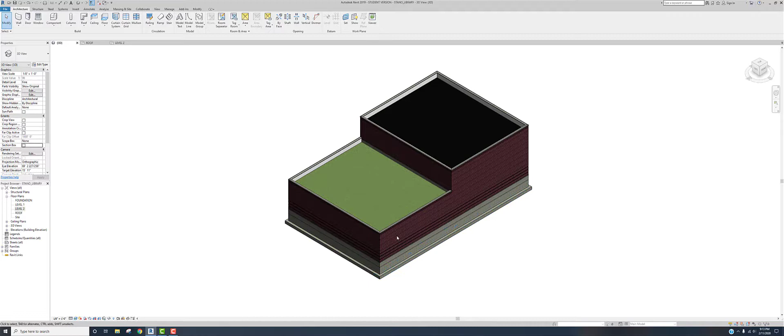We'll do the foundation, the strip footing underneath, and then take a look at our section box and look inside the building. We'll also add our columns, any other structural steel that's in there, and get that ready to go.

Then we can either extend or modify the green roof, add another separate green roof, or add another EPDM roof, depending on what you want. My area is going to actually be a little extension here to add on more green roof area.

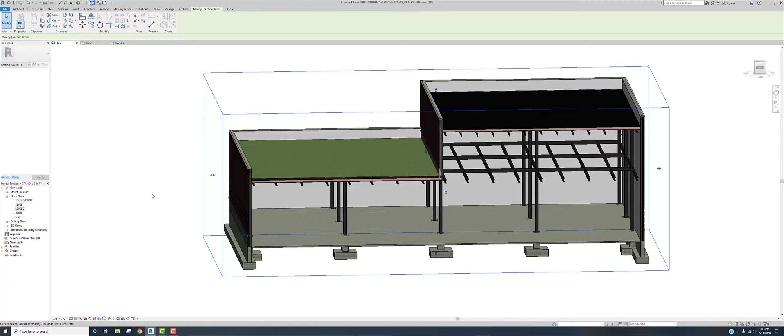Let's just turn off that section box for now and get started. So what I'm going to do is go to my Level 1 view and look at the building here. I have thin line on, detail level fine. So now I can see my exterior walls.

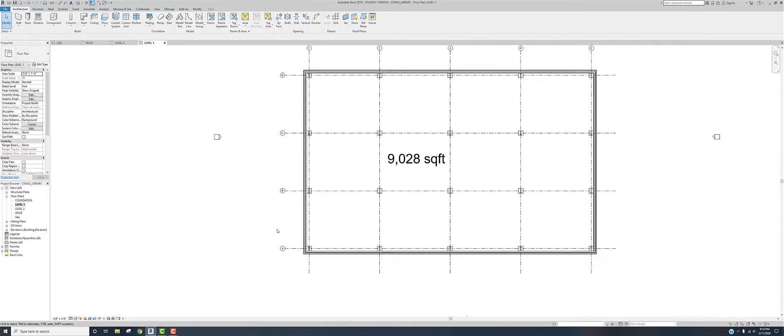I'm just going to do another wall, architectural. I have my basic exterior wall 1, and what I'm going to do is center it on this column here. Let's draw a circle that comes out from here.

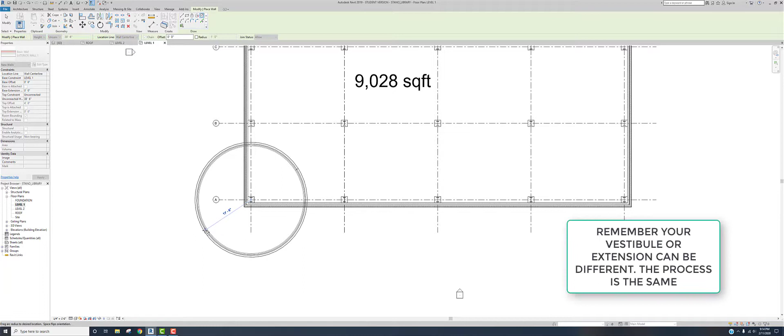This is going to be my exterior wall. So right now I'm going to come out, let's do 20 feet, nice round number, coming off the side of this building. I'm going to click, make sure the exterior wall is facing out like that. Hit escape. I'll have to do the same over here.

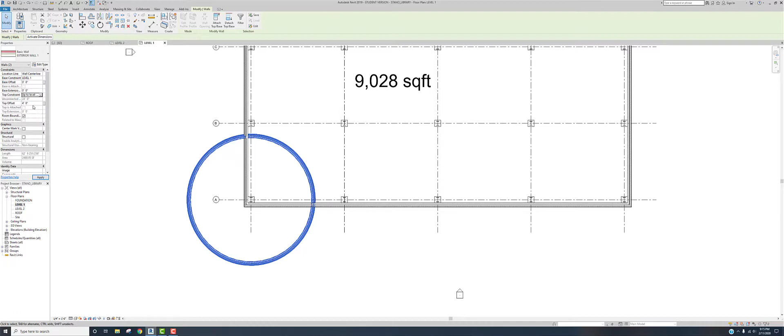So now the exterior wall's out. Level 1 is my base constraint. Let's click on both of these so I know that I have them. Hit control, click - Level 1 is my base constraint, top constraint is unconnected. I'm going to go up to Level 2 right there. Hit apply. Now let's take a look and see what we have from here.

So that is going to be part of the exterior of my building. What I need to do now is delete these wall sections right here. I'm going to trim them, delete this, and then be able to extend the roof. That will be the next part that we're going to go at.

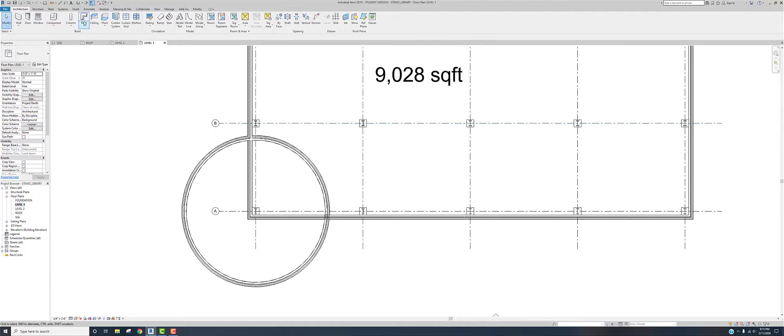So I'm going to go back to my Level 1 and start clicking on this. I'll click on this wall and do trim to corner - click this wall and this wall to trim like that. I'll do the same over here, click here and there. So now they're trimmed.

And you can see now that everything kind of flows nice and evenly. Let's look at it again. So there we go, you can see that I have a column here, and also my green roof there.

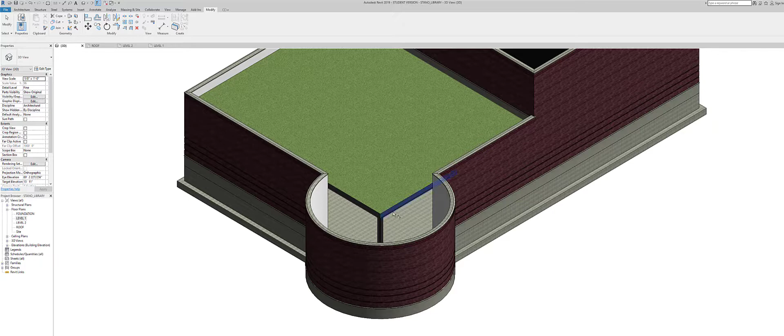I could technically bring the green roof in right now, but I want to do some other work first. Actually, let's do the green roof since I'm talking about it. So hit escape, select that green roof, and go edit footprint. Let's go back to Level 2.

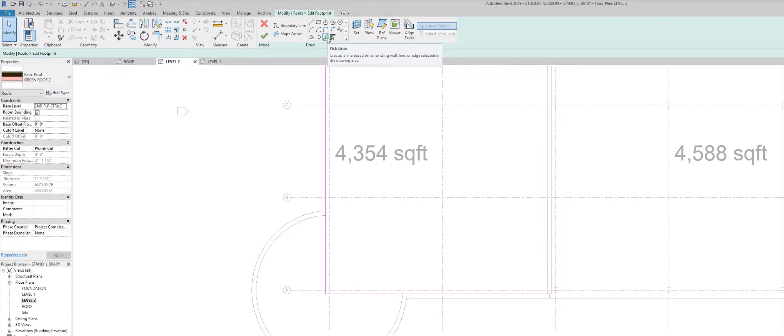So I'm now going to select, go pick line or walls - let's see which one I want to do. Let's pick line, select in like that, and like that. Yes, I know it's doing that.

And then we will do the trim to corner for this as well, so here to there, here to there. And then I can probably, let's see if I could just delete that extra. There we go, so now I have that in.

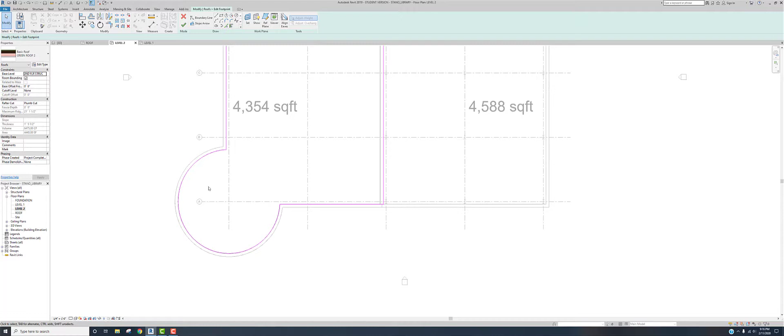You're going to be either doing something similar or not, depending on where you come off. You may not even add your green roof in here, you may do a separate green roof. Click OK.

Look at it, so now I have my green roof there. If we go underneath the building, I have no floor, so I need to extend this slab floor into this region or add another separate slab floor in there. Either way, it's not much of a difference. If I click on the floor, I can see that it's on my level 1, with no other constraints. So let's go to level 1.

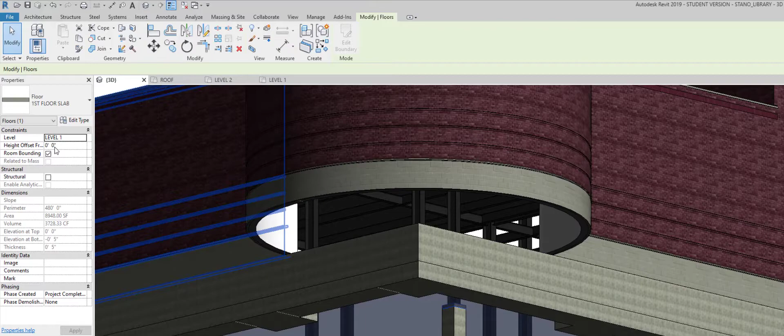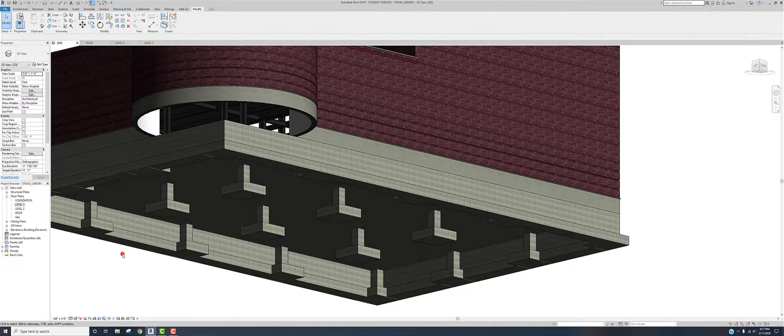What I'll do is I'm going to add in my slab. I could probably, if I select on it correctly... let's see, like this, it does not appear to let me edit the boundary for some reason. No big deal, so let's go to level 1.

Okay, so now let's get this floor in. Floor, architectural, first floor slab. What we'll do with the slab is I'm probably going to have to come either right to over here and over. We may have a slight issue with this, with our foundation. We'll give it a shot first.

We'll see what happens, so I will pick walls. Let's see how this works out for us. There we go, I got the walls picked.

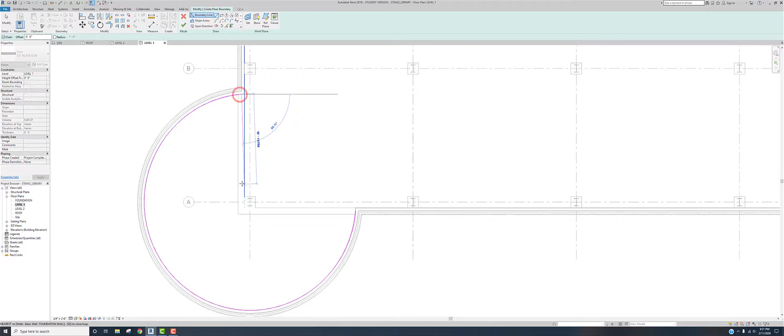Okay, so it looks like we have it. Okay, would you like to attach your walls? Yeah, let's get everything attached. Okay, so now I have the slab in.

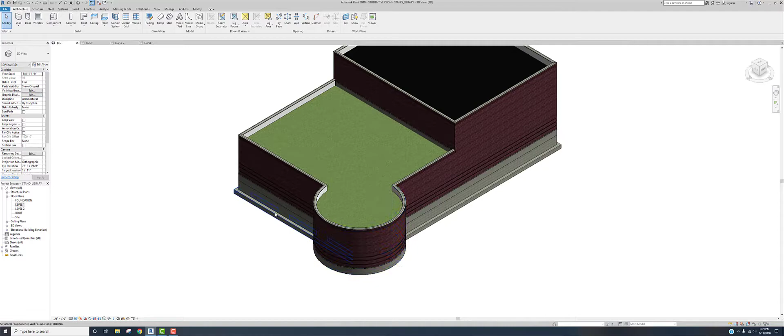Okay, so now let's add our foundation wall. What we can do is click on one of our foundation walls so we can see that it's finished face exterior, foundation, base constraint, top constraint is up to level 1. So we could do the same here. Let's go to our level 1 foundation, level 1 view.

Wall, architectural, basic wall foundation. You can click it, find it here. We're going to do wall center line, base constraint foundation, up to level 1. You need to have those parameters.

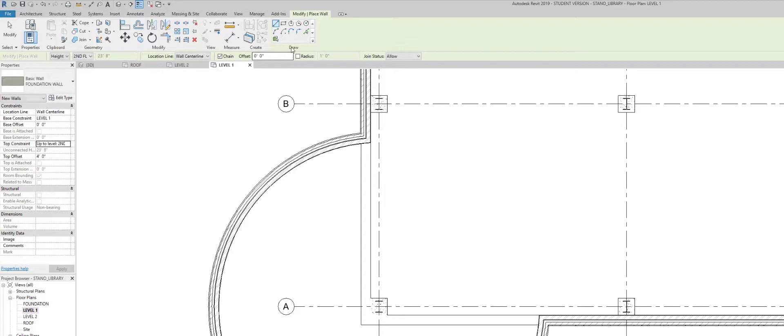Then what I'm going to do is go to pick lines. Now this looks like it's the wall center line. Same with that, so let's click. Now it appears that we have some issues here with what it's selected.

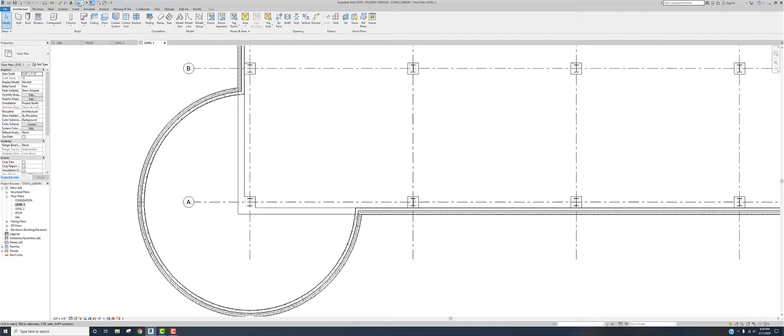Let's go to this view. All right, so let's try to change this. There we go, see how it moved it down? Click. Let's do the same here. Even though we had changed them ahead of time, it seems that...

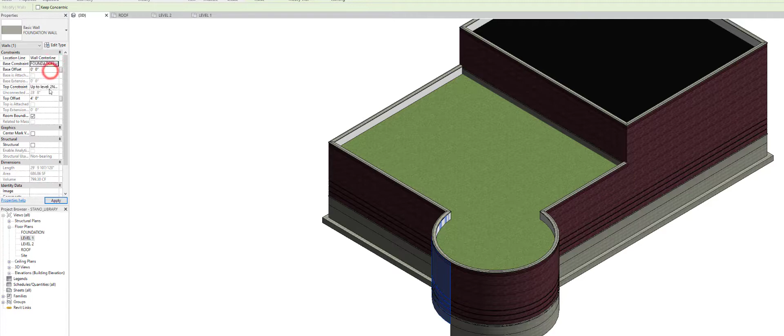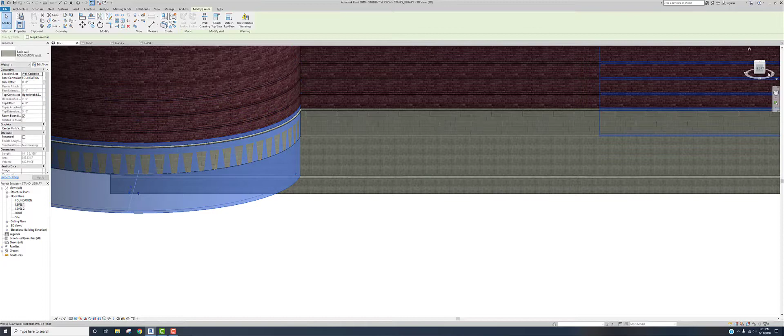We must go down even further so you can see how it's still highlighting over. So we got a base offset. Let's just check our offset. All right, so that's correct. Our top offset, okay, so change that to 0.

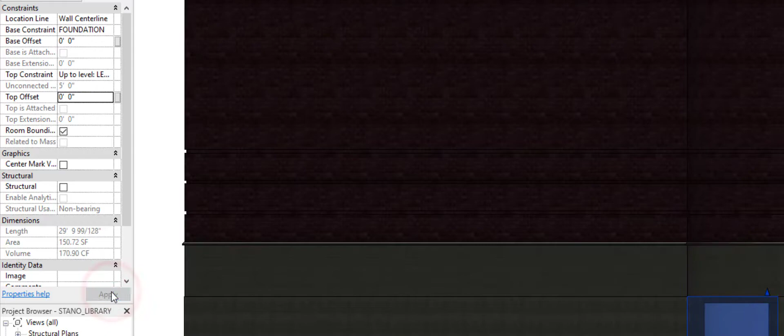And we're going to do that to the other wall too. All right, so little tweaks. There we go, now we have the foundation wall. All we need to do is add the strip footing underneath. So structure, we go to wall, foundation, click, click, and now we have that.

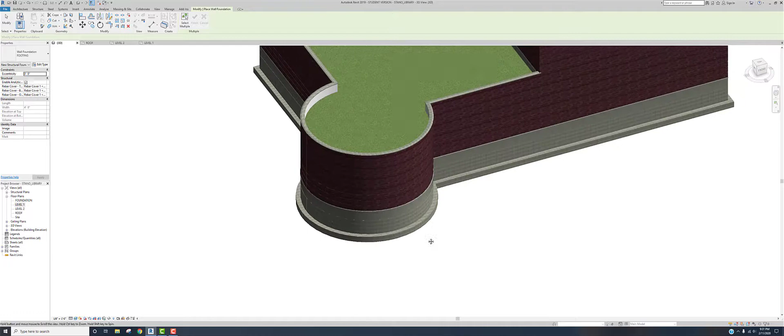Okay, so you're going to do all pretty much similar stuff. If you do a vestibule out front or some sort of extension in the front or off the sides, you're going to have to do the same thing. I recommend saving it at this point. Okay, so that's all saved.

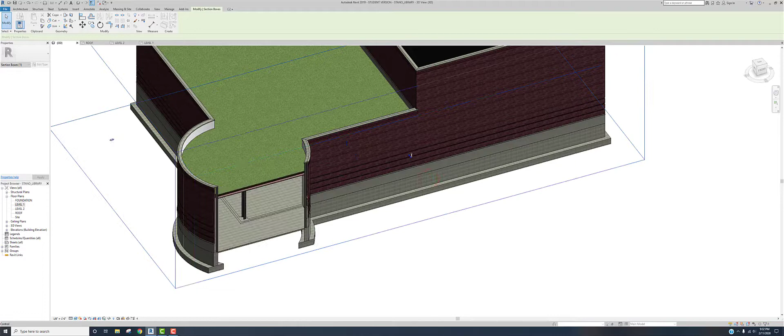Let's take a look at the section view, and take a look at inside of our building. All right, so there we have it. It looks like we got everything taken care of here.

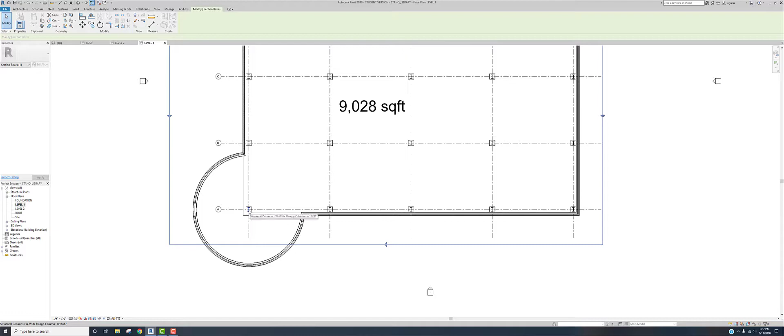Foundation wall came up. So what issue we may have now is the structural steel, because this roof needs to be supported, and there's nothing over here doing that actual supporting. So if we go to level 1 view, I might be able to get away with not having to put one of these in here or there, but I'm going to show you how to do this. It's actually not too bad.

What I'm going to do is select, hit Control, and select both items. So Control, select that, and that. So now that the concrete footing underneath and the wide flange column are selected, I'm going to then go to Copy, click the center point here, and then I drag over, and put it so it just touches up against that.

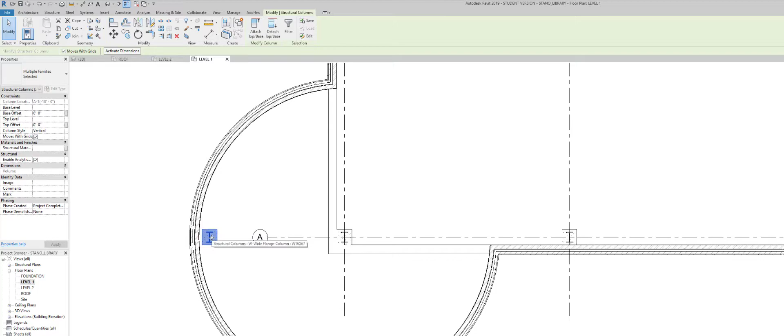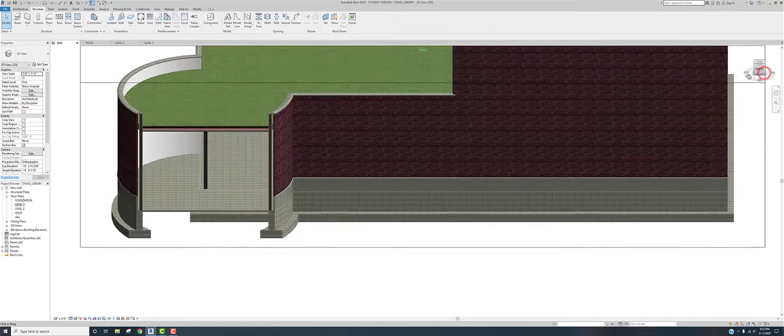I'm then going to go do the same exact thing again. Click, holding control, go to the center line, and move in. Okay, so now let's go to this view, and I don't know if it's going to be able to show it or not. All right, you can see I added my steel column in there, and it's got the footing underneath.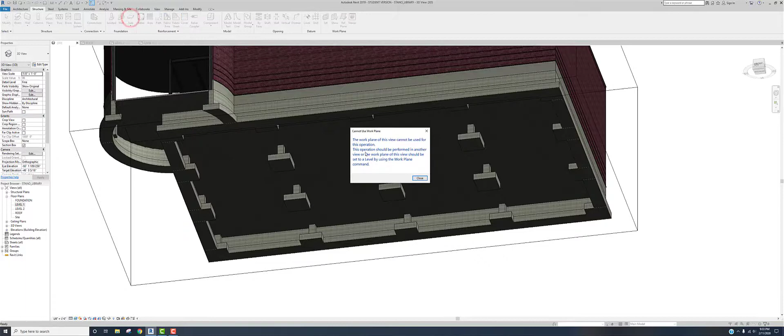If we go from the underside, all it's missing is this little piece right here, and actually we can bring those around as well and have them connect right in. So you can see here, structural foundation, I believe it's under a slab. Oh no, let's close out of that, sorry. Let's try foundation plan, yes, there they are. So you can click these and we can drag it right over and center it on that.

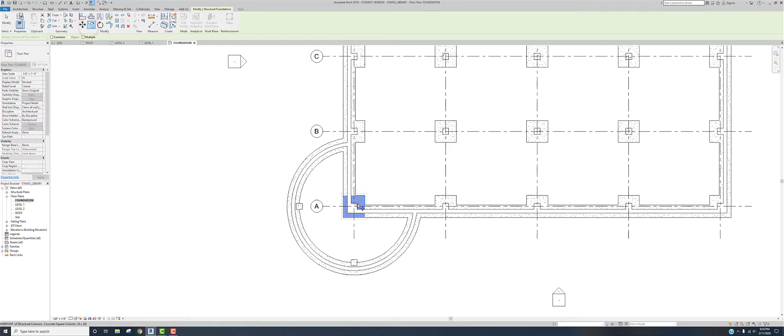Let's do that now while we're at it. So click, copy, right, centered, bring it over to the center. There we have it. Do the same again. Click, copy, find the center of that.

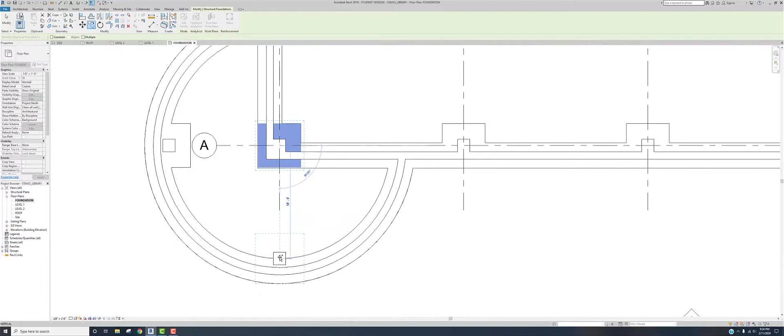There we go, done. And if we go back to this view, there we have it. So now we have the slabs underneath our columns and our steel, so that's all well supported. So now we have basically all of the bottom supported.

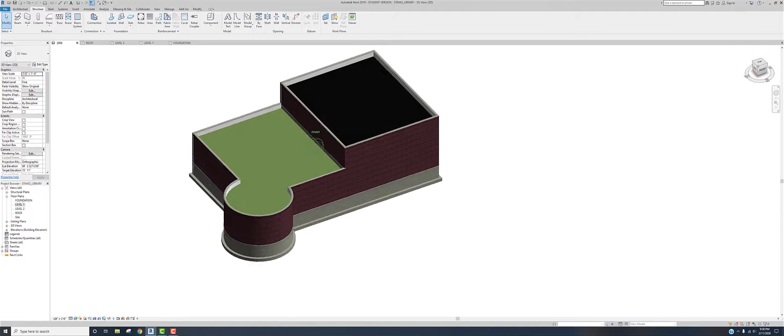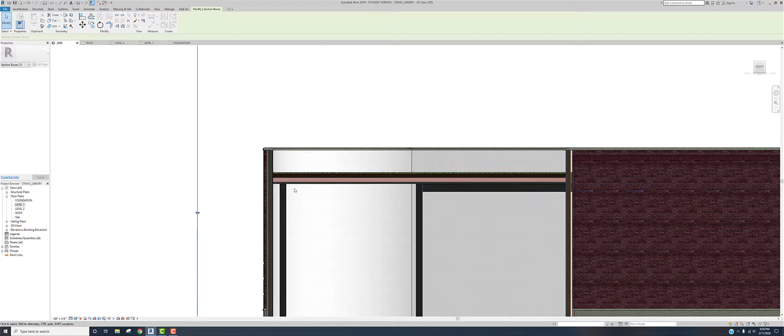So now, if we go to our section box view and take a look inside of our building, we have the footing, the concrete, the steel that is set into the concrete, and it's moving up. And we just needed to support this roof. So you can see the steel here. We're going to add that steel so that it comes around.

Yours may be a little bit different. So what I'm going to do is right click and actually hide in view the green roof. So then when we get the structural steel in, we can see how it's going to look. And I'm going to turn the section box off here now.

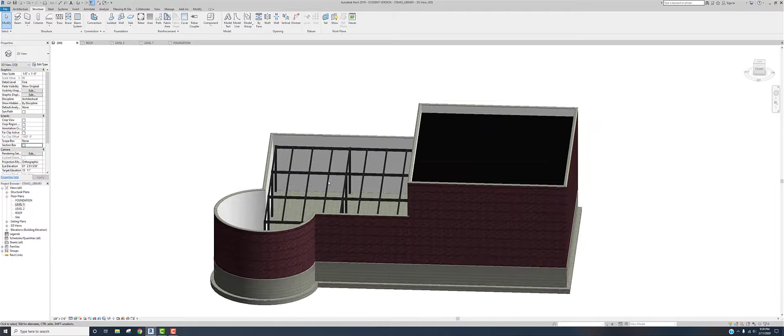Okay, so let's tilt in a little bit. And I'm going to draw steel that's going to basically connect into these beams, come around, connect, and go that way. That should give me enough support. Is it exactly 100%? No, I could probably add in some of these right here, but I'm not going to do that now. So I'm going to go to beam, reference level, second floor, structure. Right, so let's click cancel.

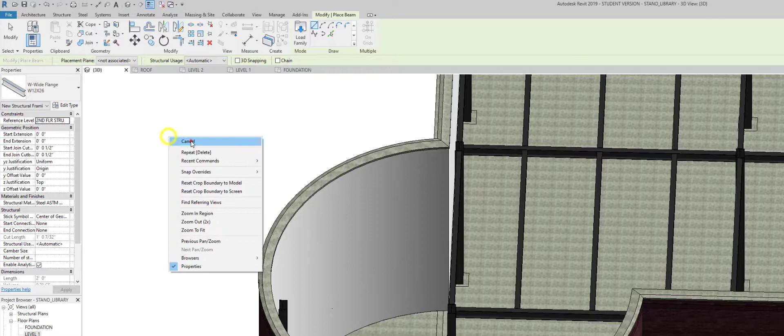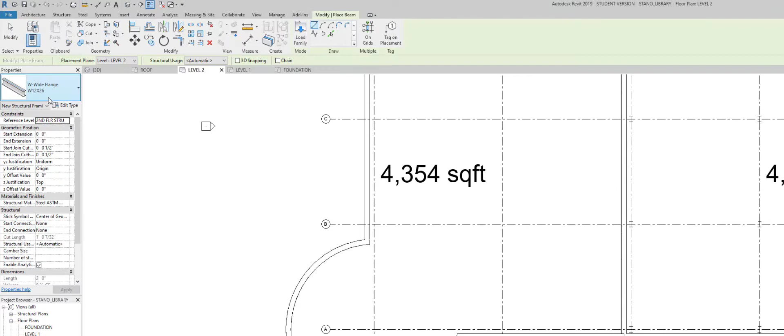Let's just make sure. So when I click on any of these beams, let's see, work plane, second floor, structure. Just to double check. So I can go into level 2 here, should be fine. Beam, reference, second floor, structure. Should be good.

I want to be able to find, these are the reference lines, but I want to go to my first floor plan level. Let's go to level 1. Beam, there it is, click. Second floor structure, click that, click the center, come around, and you can see where it's going to hit.

So because I'm not in the second floor structure, it's not showing it, but that's fine. Just avoiding the warning, I know I'm drawing them in. Click, click, come around this way. It's all right, ignore that. Click here, click. Click. And there you have it. Those are the beams drawn in.

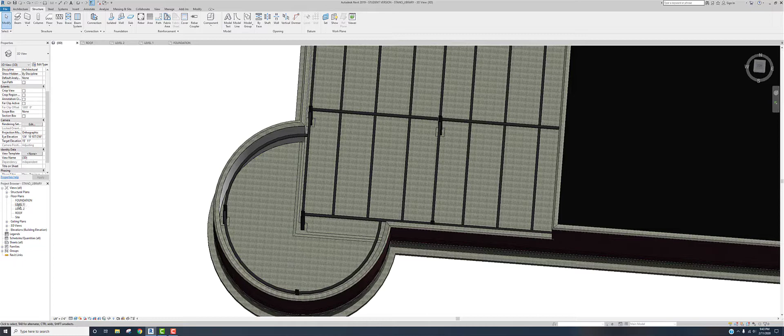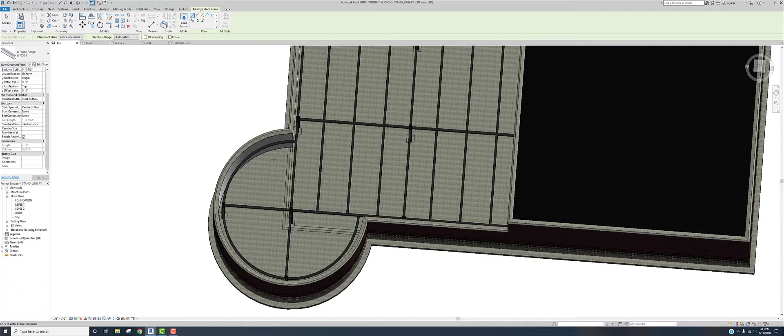All right, so now I'm just going to add one that goes across here and one that goes across there as well. So I can go back into that level 1. Beam, just going to do a straight line from here to there. Just ignore that. Here to there. And that's similar to the way you would be doing it as well. There we go. So now I have beams to support any of the roofing panels that are going to be going up on top.

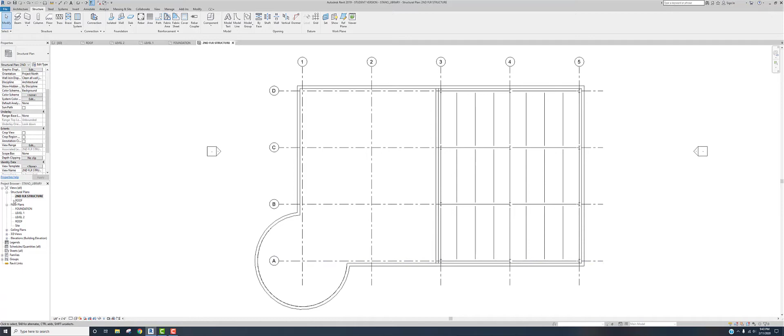And that is pretty much how you would add an extension onto here. You could technically, well, let's do it. If I click on these beams, they're 1226 as well. Let's add them in. I can go to structural plans, second floor structure. Let's see, and I could add them in. Let's go to roof and see if they're showing. Nope, not second floor structure. Let's try level 2. Yeah, see, we don't see them.

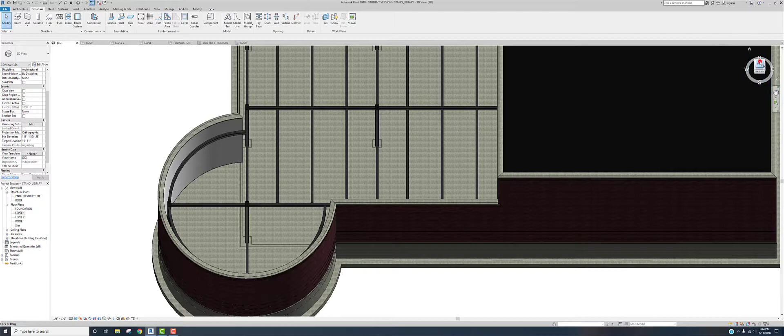All right, so you could add them in if you wanted to. Basically, you would draw. Might be able to do it right in this view. So you would follow this grid pattern over. And we can do that right here. So I'm going to go in.

Same thing, placement plane, let's go second floor structure. Structural usage automatic. There we go. So click. There's one. Like that. And we could do the same over here if we know the spacing, whatever it might be.

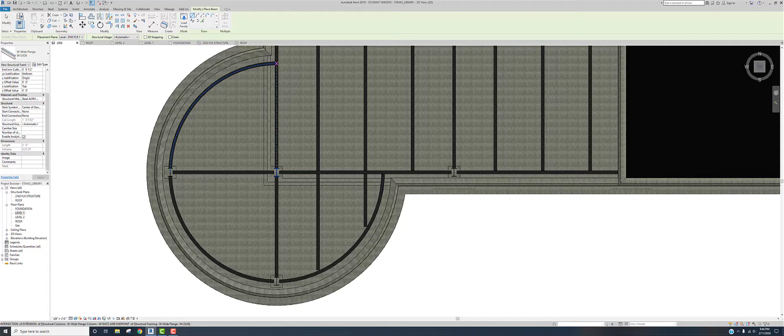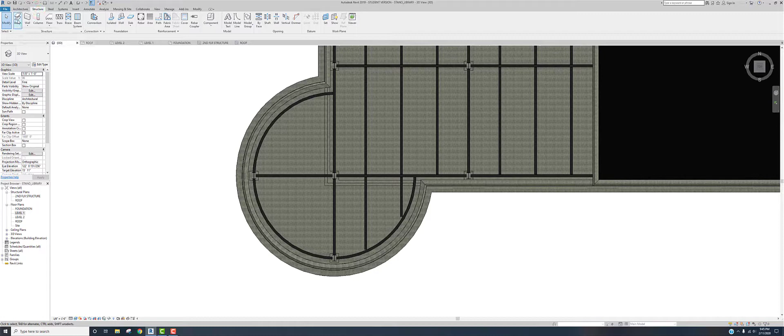Let's take a look, we can go to our dimensions. So if we go annotate, aligned. Not sure, I believe it might be 10 feet. I'm not 100% positive. I'm going to wing it here. You can always change the dimensions after. There we have it.

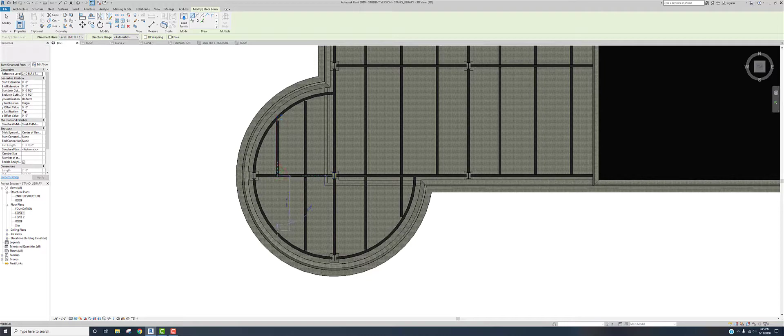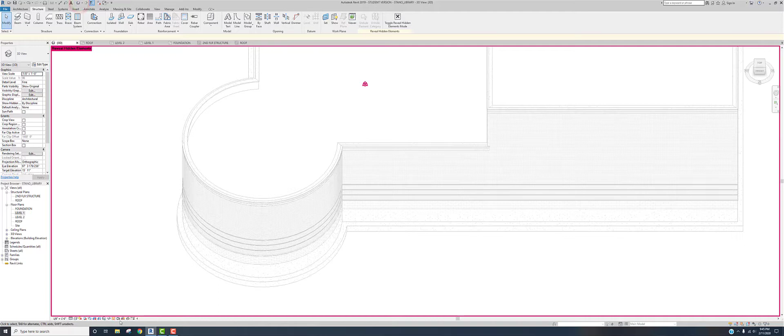Now we have enough there to fully support what we were going to have for our green roof. And if we can unhide that in view, click the little light bulb, click on the roof, elements, unhide in view. And now that is the extension that we added onto our library.